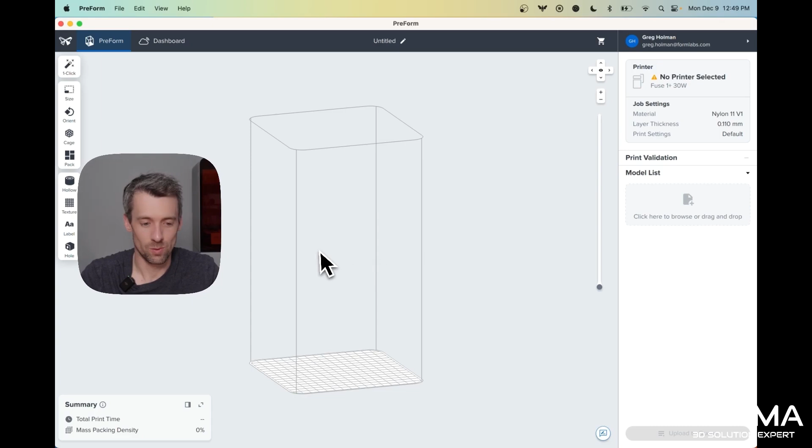What you can do is go into File, go into Open, and in the type selection dropdown, you'll see there are 7 new options, all with beta in front. We're still testing these, so we'd love your feedback, and we'll be moving them forward through the upcoming releases, improving them based on the feedback you provide us.

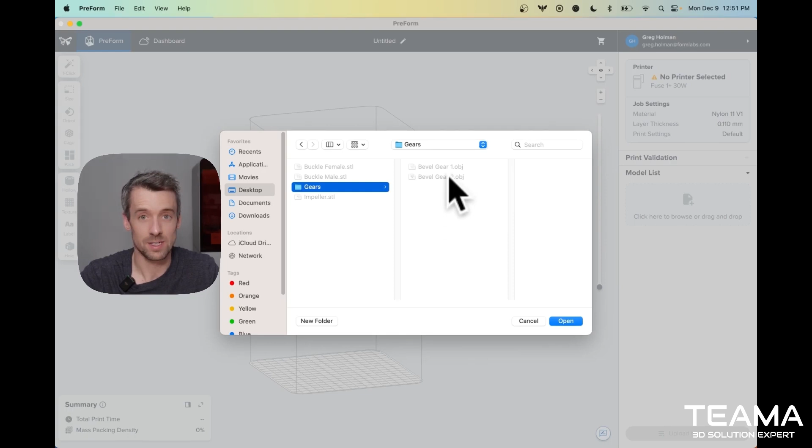So what we did was create a new feature under the File menu called Import Folder. This makes it possible to just select a folder rather than selecting all the contents and pressing Open. As you'll see here, all the contents of the folder opened.

On the SLS side, you'll have model grouping, so it'll show as a group. On the SLA side, it will just show as a list of the different models that were in that folder. This should be really helpful to ease your workflow, make it a little bit faster, and also make sure you're not missing any files within that folder.

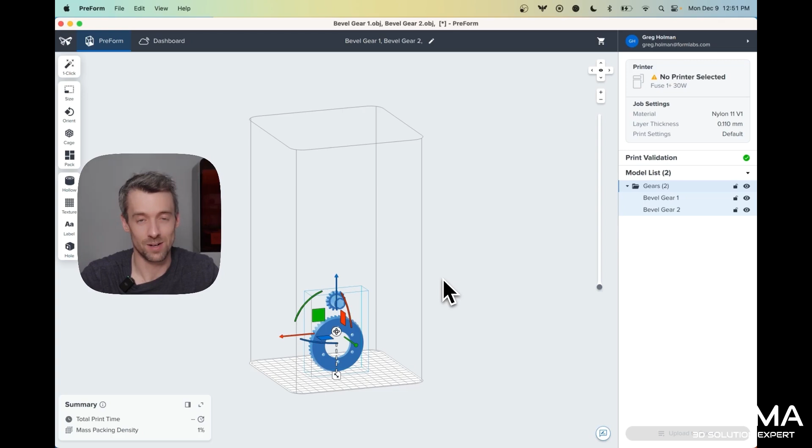Last but not least, let's talk about model grouping. In this release, model grouping is only going to be for SLS, but eventually we'll move it out to SLA as well. Model grouping makes it so you can organize your models much easier.

This is particularly important for those times where you have tens or even hundreds of models in your model list, and it's really hard to manage your different models and understand where they are without scrolling significantly and trying to find the ones you're looking for.

As we talked about in the last section, when you import your folder, they will immediately go into a group if you have SLS. If you have SLA, it'll show in a flat list of the different models that were in that folder.

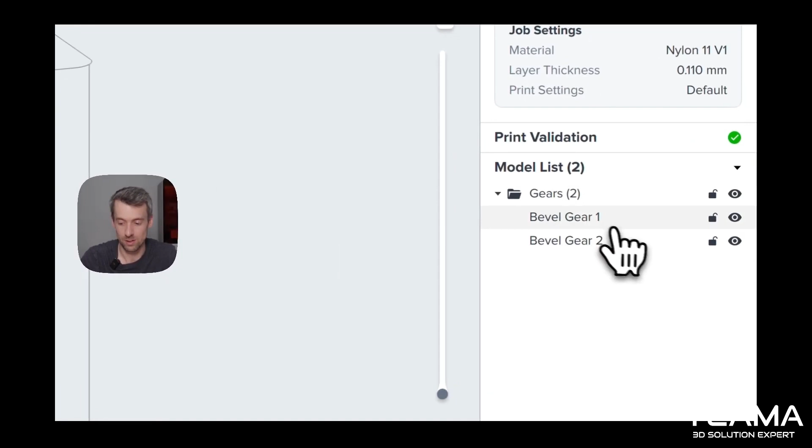But on the SLS side, you'll see it went right into a gears folder. It shows how many different models are within that folder - there's 2 models in here. So that count will always be there, and it allows you to manage them. If you select it, it'll select both of them that are in the scene.

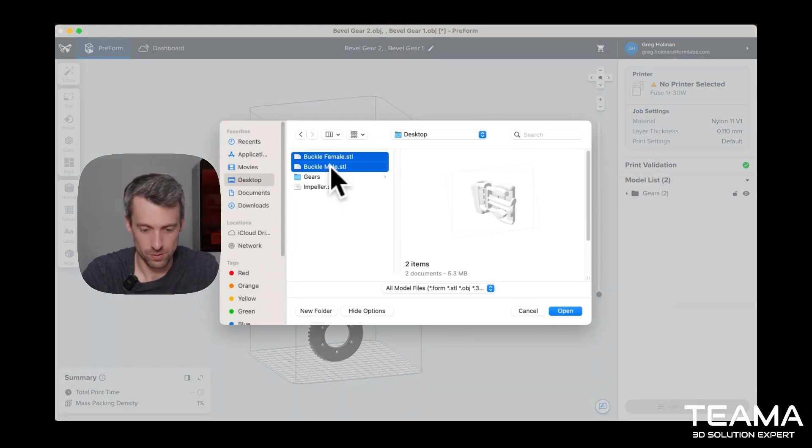So model grouping doesn't just work for folder import - it also works for general use cases within PreForm. Let's bring in a few extra models. Let's go up one, and we'll do the buckles and the impeller.

Let's say I want to print six sets of buckles, and let's do that. So now we have 6 sets of buckles. Let's right click, select them all, right click, group models, and you'll see it's called group 2. Let's call it buckles. You'll see buckles has 12 in it - 6 different buckles, 12 buckle parts, and 6 different sets of buckles.

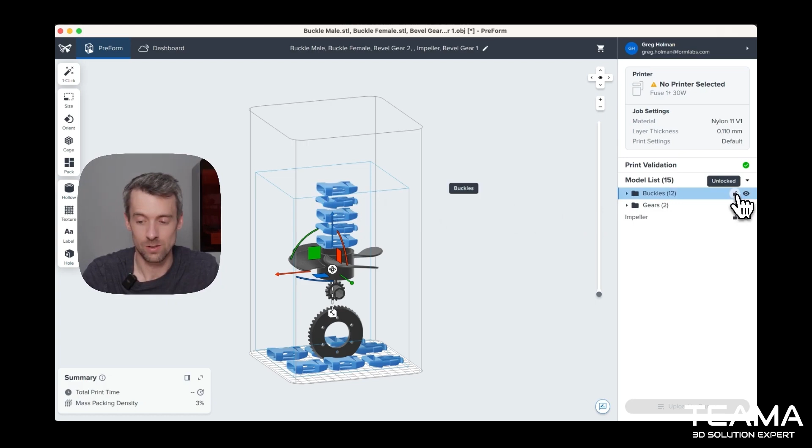Now, for buckles, you really want them to maintain this orientation for this use case - the customers asked for that, so let's lock them all. What you can do is go to the parent, the folder top, and go into lock XY rotation, and you'll see that all of the children, the buckles within the folder, inherit the value you set there for the locking.

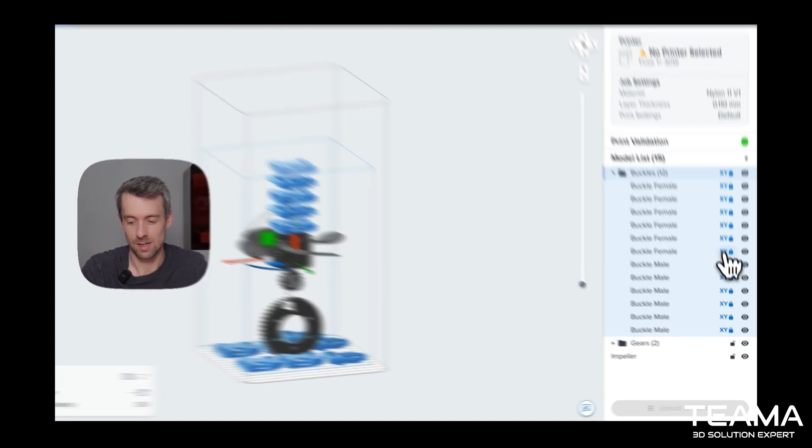And the same here for show and hide. It's a nice little feature, but let's say you want 1 or 2 of them to have a different locking mechanism. For the female buckle here, one set of buckles, let's say I want to unlock them just to see how they function on the other side, and then I can check between the 2.

You'll see I can go back and forth. I can always go back though, and at the parent level, turn it into XY, and those 2 will turn back to XY. And then you can always expand or collapse it.

If you collapse it, you'll see it's very easy to tell you have 12 different buckle models - 6 different buckles in this case, 2 gears, and an impeller - without even having to scroll or look at anything in too much detail. This should be a really helpful feature.